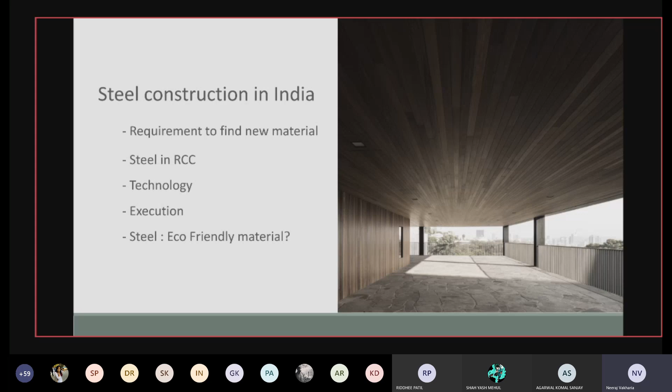So yeah, the main part of our study is structural steel. So what is it? Steel, as you know, is an alloy of iron and carbon with other elements, depending on the composition that we want. There are different types of steel, classified as mild steel, medium carbon steel, high carbon steel, low alloy steel, and high alloy steel, based on strength and appearance. Mild steel, medium carbon steel, and low alloy steel we use for steel structures.

Structural steel is a category of steel construction material that is produced with a particular cross section or shape, or some specified value of strength or chemical composition which we want based on the geographic location or the use of that element. Structural steel composition, strength, size, and shape are controlled.

So structural steel can be used for building purposes, which has been standardized by Indian standards ISI. So there are various standards based on the type of steel which we use. So as you can see, standard quality, ordinary quality. I mean, some elements which we just use for a support, some we use as a structural element which is going to carry load. So based on that, there are these types.

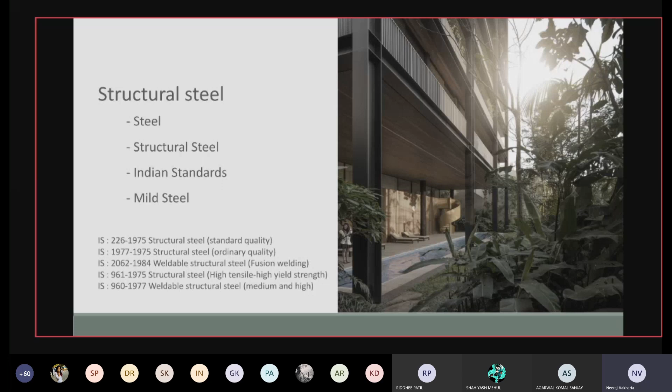So why do we opt for steel when we are designing? There are some factors which we have to consider when we are designing it. So first of all, lightness. Steel structures are very light compared to other structures such as concrete or stone or wood. But stone and wood have a different consideration, that they can't go much taller without heavier cross sections. So the material is light. That is the main thing.

Then high strength and stiffness per weight ratio. Even a smaller section can be compared with a bit larger cross section of concrete, since it is very stiff and possesses high strength. Then ease of fabrication and mass production. It is easy to fabricate a steel structure, so it is generally used for mass construction. If you have a frame structure which has multiple bays or multiple modules of the same thing, similar members can be produced in a larger way by the manufacturer, so it is easy to construct.

The steel members can also easily be replaced and assembled or disassembled. So if in future you want to take your project further and expand it, it is easy to install a new construction and attach it to the existing thing. In a steel structure, it's pretty much easy.

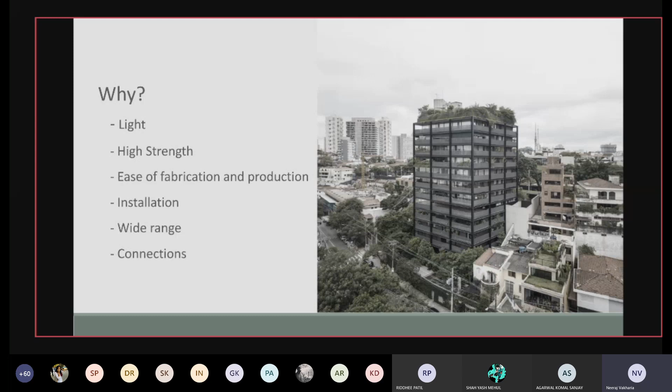So now we'll see how it differs from a regular RCC structure. So first, if we see dynamic loads, RCC structures are very brittle and they are much less resistant to dynamic loads like earthquake and wind. Since steel structures are ductile in nature, it increases their resistance to dynamic load.

Then self-weight or dead load. If we consider a concrete column or concrete frame structure, the volume of concrete is such that its self weight increases very much, and you also have to consider that and add it into the design. And in a steel structure, since the smaller sections can carry a higher load, the sections are smaller and the self weight is almost 30 to 40% reduced.

Then foundation. To carry the huge load of an RCC structure, of course, the foundation also has to be larger, considering the size of the column at the ground floor and then in the foundation. But a steel structure does not require that heavy a foundation. It just needs to reach the end bearing strata, and the size is not that much increased.

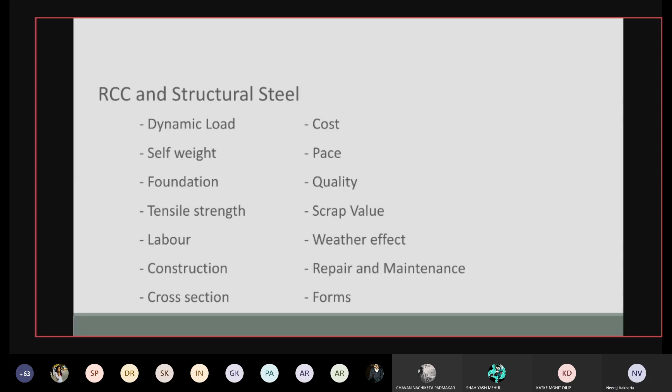So now we'll go to structural steel members. So what are the members or elements that we work with while designing a structure? So there are two types basically. First is rolled sections. Another one is built-up sections. So rolled sections means the element is homogeneous. Like if we consider an I section as a beam, the flange and web both are connected and it has been manufactured that way. It has not been created and then attached with each other.

But those sections, there is a limit to what we get in market. After a particular size, we won't be able to get rolled sections in a larger size. So for that, we go for built-up sections. Here, as you can see in the image, the above two images are of rolled sections, and the bottom two images in the bottom right corner, if you see, the top and bottom flange have been welded with the web. So, as per the requirement, it has been later designed and then constructed on site.

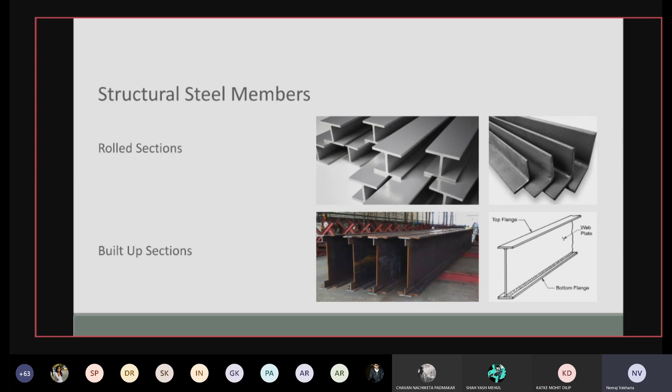Why are they called sections? Because generally when we consider a steel, mostly we consider its cross-sectional area, how much load it is going to sustain. So even I'm not sure. I've never thought of why it is called sections, but that can be it, because it is generally measured on its cross-sectional area. Yeah.

Acha, rolled, because the process of making this section is they roll the circular steel bars while making it and heat them up at a very high level, and then they shape this. So even if you see the edges of these sections, unless they are cut later on, they are pretty much, like in AutoCAD terms, fillet circular. So they are rolled sections because the process of making it is to roll and heat up at a very high level. It has nothing to do with its shape, the name. Yeah.

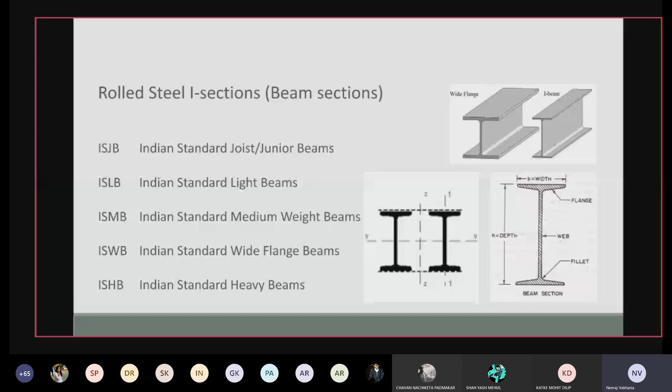If you see the top right image, you must have seen these type of columns on railway stations in Mumbai. So two C sections are braced or welded together to make a column.

We generally don't use a singular circular or square cuboid section, because these two C sections connecting to each other give us the freedom of designing members according to the strength we require. So the material doesn't get wasted. That's why we use these type of sections.

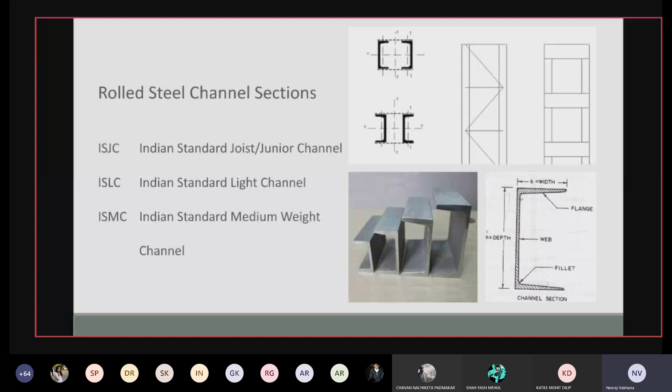Then, rolled T section. In this section, the shape looks like a T, that's why it is called T. According to the sizes: normal T bar, wide flange, long leg, light T, junior. All these sections you will get to know in the steel table later on.

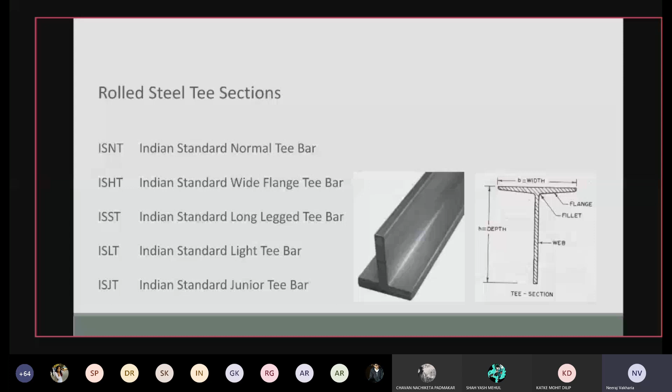So right now don't worry about the names. Then rolled steel angle sections - these are equal angles. You must have seen these commonly for shading, temporary shelter, or roof, or brackets for grills, not as a structural element but as a supportive element. This is used widely.

Equal angles mean both sides are equal, if you see. In unequal angles, one length is larger than the other. And there's the bulb angle, which even I haven't used or seen on site, but yeah, these sections are available.

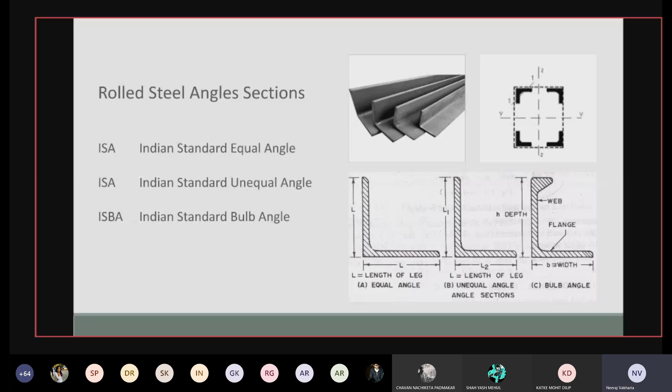Then rolled steel bars - these are solid, round or square, or customized bars. The solid sections are not generally used as a construction element, but if you see grills which are circular, we use these sections in smaller amounts, because if used in a larger cross section it will be very heavy, which is not required in construction.

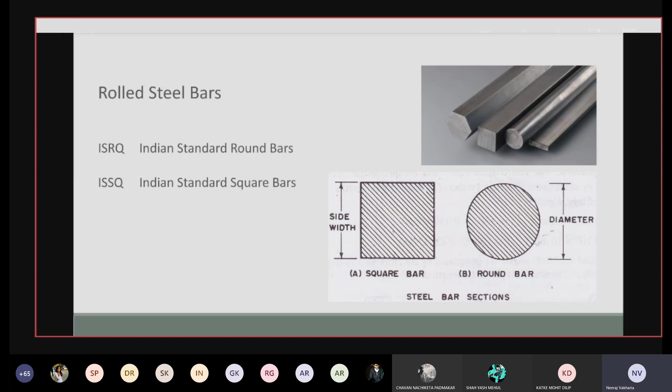Then steel tubes, rolled steel tubes, steel flats, steel sheet strips, and steel plates. Square and circular tubes are generally used for tensile structures. They can vary in many sizes.

Steel flats are thinner, just a plate of steel. These plates we get can be used for built-up sections, to create built-up sections. Again, those sizes are available in the market in smaller sizes.

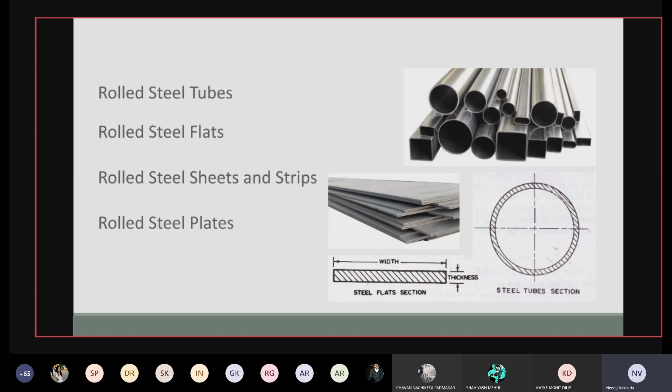Then the next topic is steel construction systems. There are mainly two types: the conventional steel construction, which we generally do in India at a very large scale, and the other is PEB, pre-engineered building. Conventional steel construction and reinforced concrete construction in India go hand in hand.

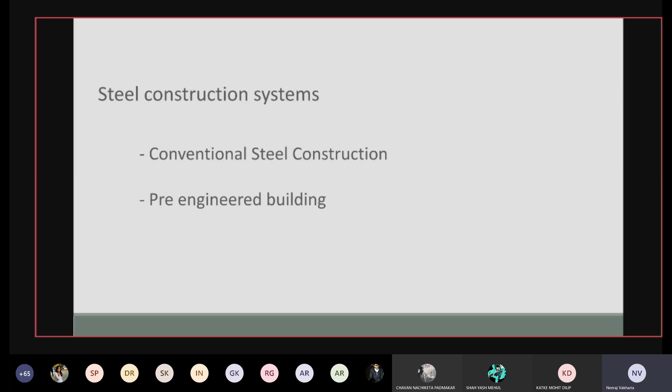Sometimes we combine these two systems to create a project for low-rise non-residential buildings, or even sometimes in residential construction.

The built-up sections are, as I said, I have got doubts from Sarthak - the difference between built-up and heavy sections.

Built-up sections are made with plates, just flat plates, because sometimes to construct a flyover or railway bridge passing over, we don't get readily available sections for those huge sizes. Those girders are almost 1 meter by 500 or 1 meter by 400. So no one keeps those sections available in the market.

So if we want those, we generally create them on site or at a fabrication place by using plates. That's why heavy sections are not used - generally we use built-up sections if we are going for a larger span or larger cross-sectional area.

Heavy section just means it gets manufactured at the manufacturer's place and then transported. But even transporting those large beams is difficult. That's why we use built-up sections.

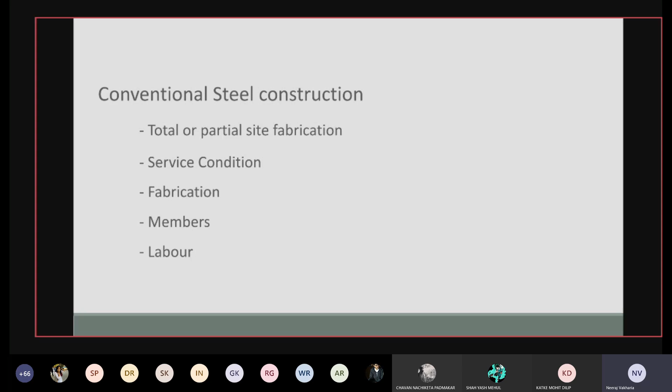We also require to employ skilled manpower for it, like fitters, gas cutters, or welders. So for this, they are available to carry out this work on site. These fabricators are available because they are only providing it. So this is what happens.

Then if we see another type, which is PEB, pre-engineered building. These buildings are engineered at factory and then assembled at site. Usually PEBs are steel structures. Concrete structures also can be pre-engineered.

I got a link from here. I'll check it later, okay.

So generally pre-engineered buildings are of steel. Built-up sections are fabricated at the factory to the exact size required by a structural engineer, and then they are transported to site and assembled with bolted or riveted connections. So if we see the advantage, they reduce the total construction time by at least 40%.

In PEB, what we do is we work with digital softwares and determine the loads which it is going to face way before it is going to execute. So we can crack the exact size which is required and design it accordingly, which saves cost of course, and lowers cost. So saving is accomplished in design, manufacture, and erection cost.

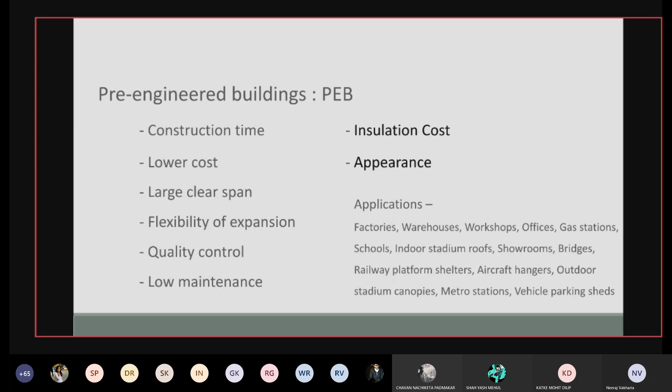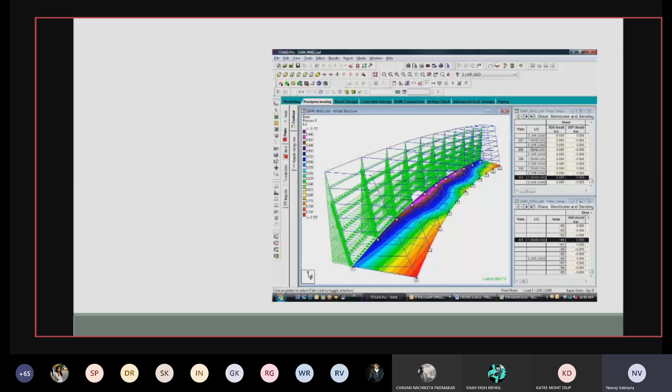This is the typical example of pre-engineered building, where there are similar multiple sections installed to create a larger space.

Now if we compare both systems, conventional steel buildings are generally designed by the consultants. In pre-engineered building, when we give our design or concept to a manufacturer, he designs and gives the best solution for the sections and the frame, how it is going to be. Generally the tendency is always to make the building light - light means the load of it, self load of it, to make it lesser.

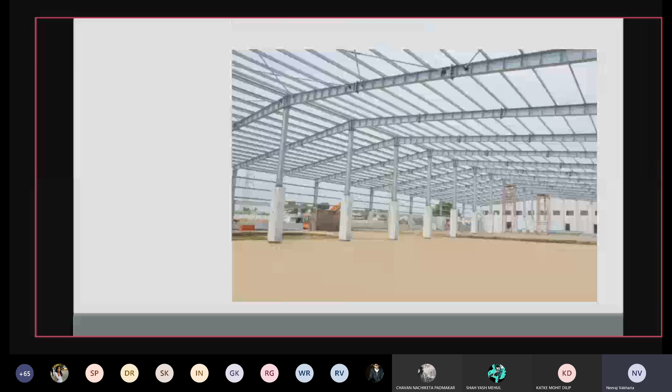Then material for conventional steel buildings are hot rolled sections which have low strength and high ductility. But in pre-engineered buildings, mostly built-up sections are used from hot rolled plates. Thin plates are used, and medium to high strength materials are required. Now, pre-engineered building also it costs.

We can't usually use it for a smaller project. It is not viable to use it for smaller projects. So for smaller projects, we use the conventional steel building system, which needs low strength material and fabrication.

In the conventional system, the holes, shapes, and alterations required are made on site. Holes for rivets or bolts are made on site, gas cutting or shearing is done on site, and manual welding is done. So the quality can't be controlled for welding because manpower is involved.

But in pre-engineered building, it is auto welded at the factory with the required material and required amount, and holes are punched with machines, so the precision is very high.

In the conventional system, creating primary members takes less time because we get them readily available from the market. But in pre-engineered building, since they are large projects, manufacturing of those primary sections takes a very large amount of time, so we have to consider that before starting a project, and account for the time required for manufacturing.

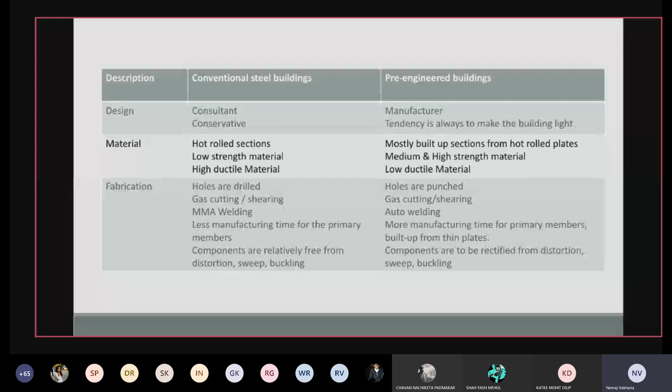I guess that's pretty much it for today. This was just the basic idea of why steel is used and what factors are considered while designing it. The more technical part we'll get into later, even when Bhargav joins. This is just the broad understanding of the material steel.